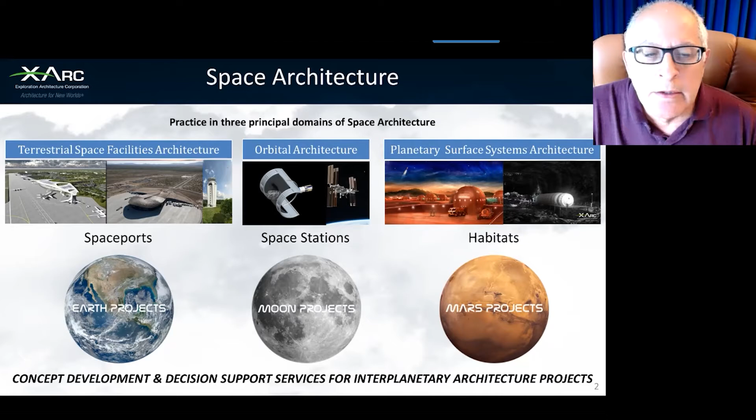This is the stuff that supports spacefaring activities here on Earth, such as spaceports. So we like to consider ourselves, XArc here, as interplanetary architects. We have projects on all 3 planets, or we're endeavoring to have technology development for all 3 planets.

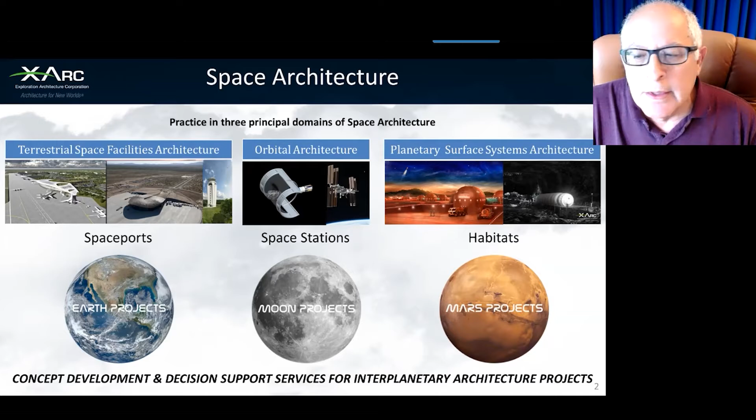A little background on XArc: it's been around since 2007, mostly working in the spaceport environment. We were part of the team that did the first commercial spaceport in Mojave with Virgin Galactic and Spaceport America. We also were pretty instrumental in leading the concept design for the Houston spaceport, and those 2 spaceports have been pretty successful. They're ongoing.

So these are realized projects that are happening from what we do. Our latest customer is the U.S. Transportation Command. These are the guys that transport military personnel and material all around the globe and get forward bases set up. They want us to look at the idea of spaceports globally for point-to-point rocket cargo in under an hour of time. Our role there is to understand the logistical constraints and the infrastructure requirements for supporting that type of activity. So it's not just the rockets, it's the ground support systems that have to be put in place and understood.

So after 2007, through some time trying to understand our niche in the marketplace and the recent development of commercial space activities going on right now, we spun off from XArc a company called Astroport, started last year in 2020, to do the civil engineering part of it. You can think of XArc as the architects and Astroport as the civil engineers for the construction of lunar surface and eventually Mars applications, understanding the materials needed for construction and the processes and methodology for how you do these civil engineering projects.

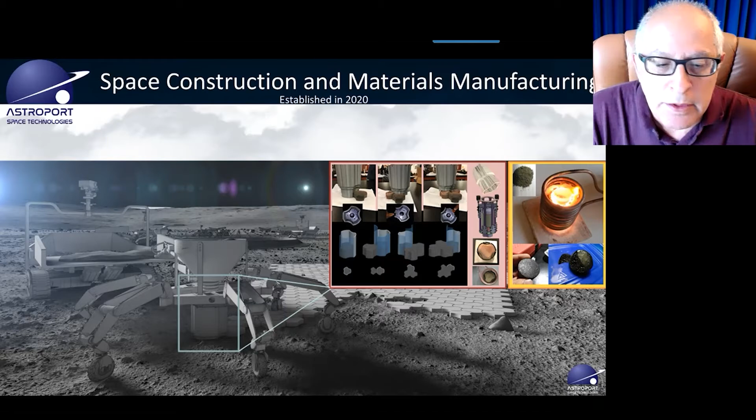The other organization is Wex Foundation. This is our NASA Space STEM education group. We believe it's important to grow this next generation of engineers and aerospace enthusiasts, and that anybody can be involved in space. With some substantial funding from NASA, we've been able to set up 2 programs.

One is called LCATS, the Lunar Caves Analog Test Site Program. That curriculum was pretty successful, so we received another grant from NASA to establish the program in schools around the nation. We have about 28 schools already established for the curriculum. We target middle school through high school students. Our idea here is to take the framework of the technology we're developing and turn it over to the students to help us with solutions in that regard.

So the whole aspect of what we look at is we have planetary features of pits and lava tubes that serve as the basis of our technology development.

So this again is the framework that we circle our technology when we start or choose a technology to develop. How do you access these pits? How do you deal with them in terms of exploration and reconnaissance? How do you actually live in them? How do you use them for habitability?

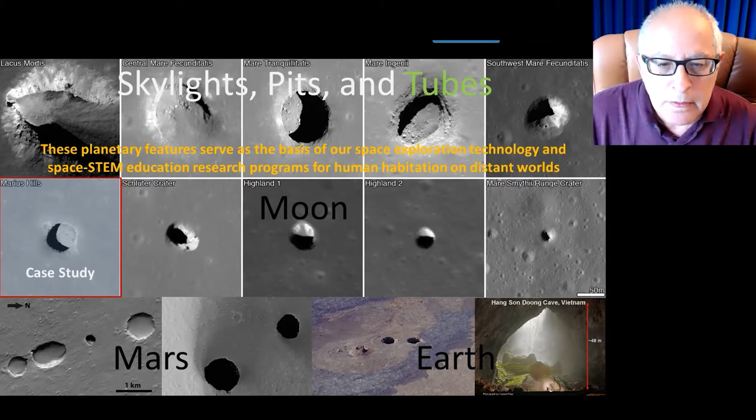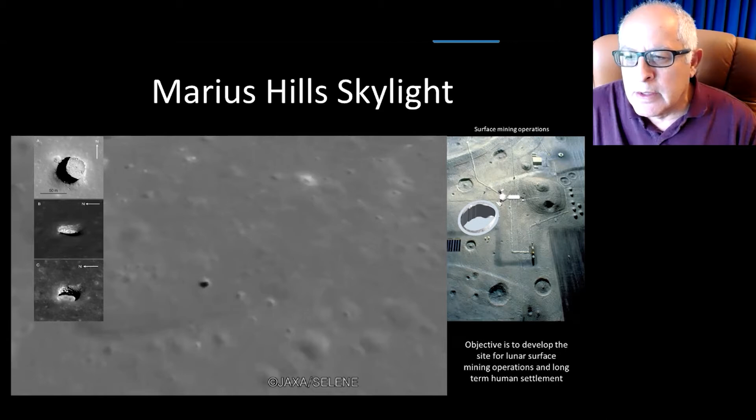So with that, we focus on one particular one called the Marius Hills Skylight. We think that this serves as a framework and a basis for technologies that not only apply to this particular site, but to any lunar pit or lava tube. And the idea here is to understand the site for surface mining operations and eventually development of the site and what you need to do to put it in place.

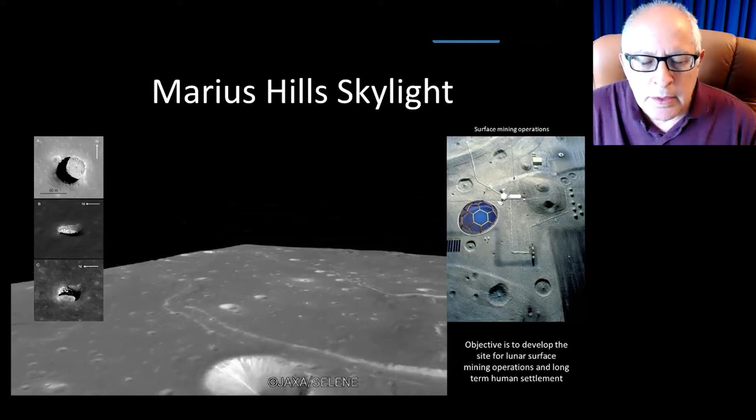So eventually get to a point where you have it covered. The dome is just notional. We don't probably see that happening, as Grant mentioned - probably wouldn't be a clear dome and not as high. But the idea here is to take that site and understand the surface infrastructure requirements for it.

I don't know if you see the cursor here, but the spaceport itself, the landing port, part of it, is located behind some geographic feature to help with the plume blast and mitigation of sandblast on your assets that have already been put in place. There's probably a more developed site later on.

And then we have over here the surface mining activity where we're harvesting the regolith and producing with the processing plant fuels and oxygens, and then burying for storage. Nuclear option over here for the power system, again behind some sort of rim for protection. You have to have it some distance away, and then augmented also with solar arrays and communication towers.

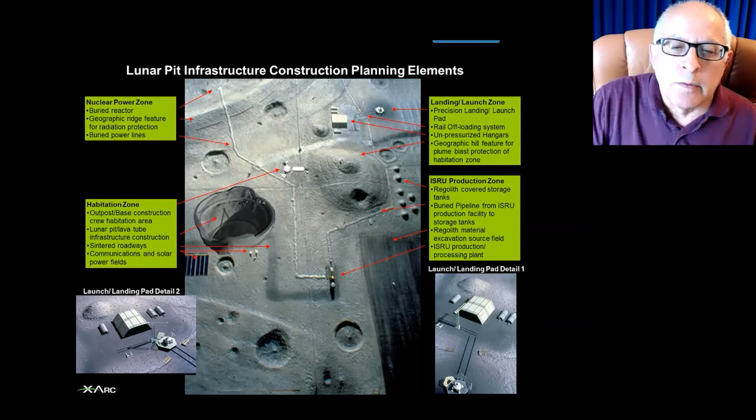And then there's the construction activity going on around the pit as we get to a point where we can do that kind of thing for making it habitable and useful as a place for settlement. Initially, I think that you're going to have just as much surface infrastructure and surface habitats as you will underneath the surface as well. Certainly in the first days of the construction, you need to have the construction crews and the way to do the operations of all the machinery that's going to be happening over there.

So we have a notional framework for what's the phases of the development of a site like this. We call it Lunar Ecosystem Architectural Prototype, or LEAP-2. It's a consortium of companies that have come together with us to develop these different technologies. Each one sometimes works collaboratively, or sometimes they work on their own R&D. But the idea is to focus the technology development on the lunar pits or the lava tubes.

And we use this timeline, and timelines are kind of tricky. We never know how the programs are going to go and what's going to happen in terms of the policies. But we use this timeline in that any phase of it, there's a technology that can be used and developed that's going to be useful. You don't have to start from the beginning to the end - you can insert your technology development at any point in there.

So beginning with reconnaissance missions for remote sensing - we're doing that right now. I think we have orbiting satellites around the moon, and they're doing all the mapping that we see almost every day now. Then the next phase is going to be the scientific robotic reconnaissance missions - these are the autonomous missions that will go there to explore the pits, explore the site. This timeline, 2025, we probably won't make that. I think the first CLPS lander is trying to get to one of these lunar pits.

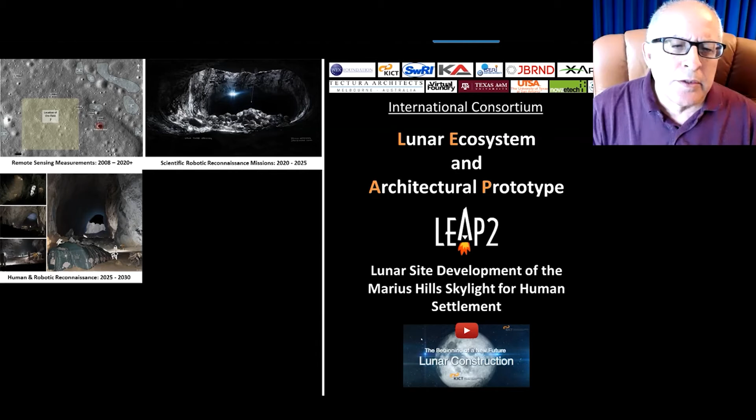I don't know if they'll ever be able to get into it in that time frame, but eventually we'll be there. And then we get to the next phase, which is the human reconnaissance part of it. This is the human robotics, where the humans come to ground truth what the robots found, to make sure that the pit is even a viable location, that it's structurally sound for long-term habitation, and it's basically human exploration of the pit itself and the caves.

And from there, you go into the next phase, which would be more of a long duration stay. The prior phase is probably 3-day missions, short duration missions. When we get to the long duration stay, now we're talking maybe months at a time. We probably have the ability at this point for a more permanent infrastructure or habitation module that we put in there.

This is kind of a notional idea of an inflatable that could be installed for a longer stay.

From there, by the mid-century we get into the construction part of it, the real civil engineering and development, clearing out the site and debris, and access to the tunnels. You have to remember that the pit floor at the pit location is the collapsed part of it. So the roof is on top that you're walking on, and you're probably going to be walking down to a bunch of rubble debris to get down into the cave, and maybe it's even going to be blocked before that point. So you want to clear it out and start putting in your infrastructure for the long term. Then by the end of the century is when we start talking about real long term.

Sophisticated, mobile, hundreds of people living in a base.

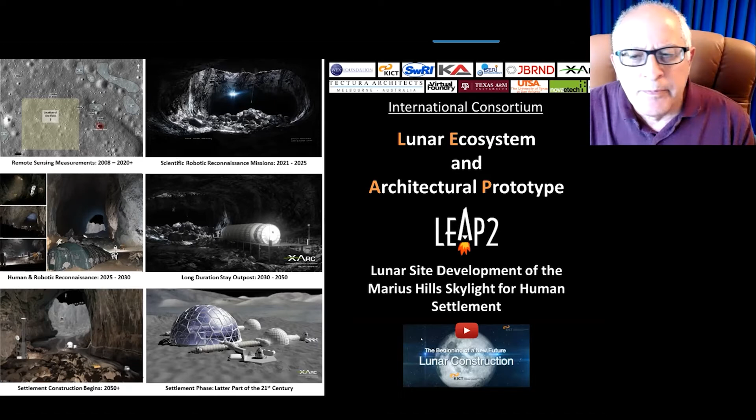Let me go to the technology we're working on right now. This is one of our first technology developments. We want to learn how to design our equipment and hardware so that we understand the environment in terms of the dust.

This little measurement instrument is measuring dust accumulation rates. It's a small instrument that fits in the palm of your hand. We want to get it on the CLPS mission. It uses a pretty mature technology called QCM, quartz crystal microbalance, and what it does is measure on the crystal itself. You can see there's a small crystal, and as grains or microparticles land on it, it measures the frequency change, which over time gives you an accumulation rate of grains continuing to fall on it.

For example, man-made disturbances of the surface, such as a robot moving by—or in the case of the CLPS mission, it wouldn't be a human at that point—robots moving by, or even micrometeorite disturbances, and natural phenomena such as what you see at the terminators at sunset and sunrise, where there's an observed phenomenon of dust grains arising at that time period.

So first, it's a science mission to understand that phenomena, and secondly, it's an engineering mission, because if we can understand the dust accumulation rates, you can extrapolate that to understand how much dust you're going to have over a period of time landing on your solar panels or in your gears and whatnot.

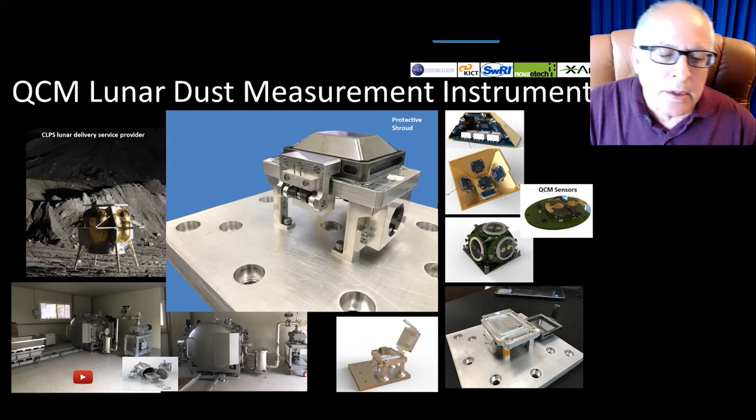We've done vacuum chamber tests on it. Maybe I can show you this test here—this is kind of interesting. Let's see if this will come up or not.

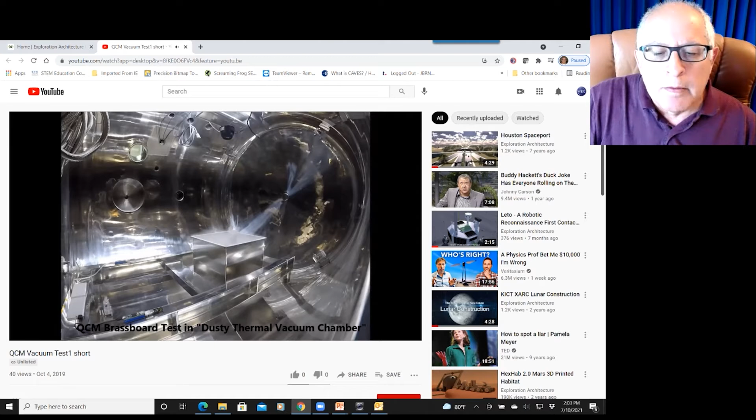So this shows we put it in a vacuum, and we learned right away that we're going to have to cover it. This is a thermal vacuum chamber, evacuating the air with the simulant in there. You can see right away it starts boiling up and saturates the crystal immediately. That's when we went to the dust cover. After a while, you'll see it get to an eruption boiling point.

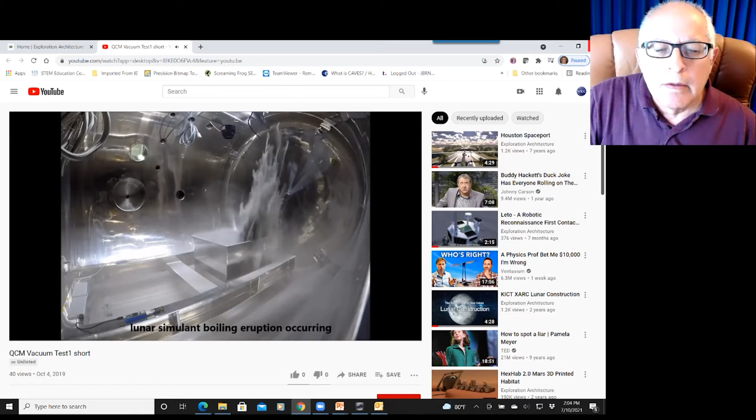So from that, then we go into what we're doing with the ISRU technology. We're trying to take the dust, the simulants. We have a quarry here in Texas. We're located in San Antonio, and we have a quarry called the Knippa Quarry, and that's where we get our basalt simulant.

It's not an exact match, but it's got the mechanical properties. It doesn't have the chemical properties, but it's very good for at least getting the first order of magnitude indication of what we can do with it in terms of melting it and turning it into stabilized or solid material.

We're also looking at how we can turn it into an extrusion material. So we've been doing tests with some of these bricks we've been making, also laser seaming it down here at the bottom. You see some laser seams—we've taken a laser and tried to seam the bricks together. So when we started doing that, we started thinking about how we actually apply this.

We have two ways of doing this. We're doing brick forming, where we're actually melting it through an induction heater, and then printing out the tiles for landing pad applications. You can see here one application: we would print these tiles, and they'd be melded together on the sides, but on the top they'd be seamed together with the laser seam as well.

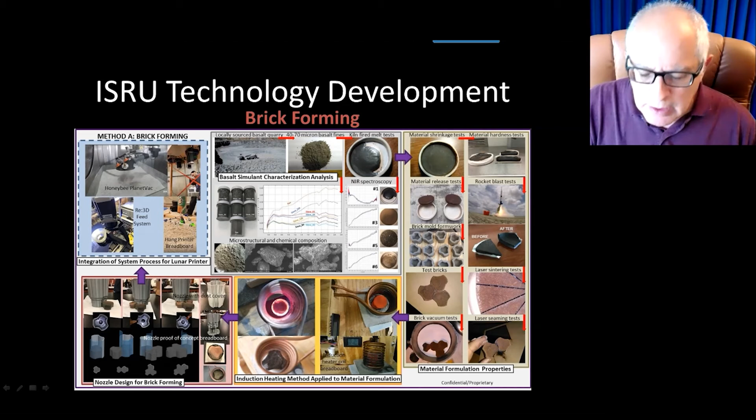One of the things we're working on is a collaboration with Honeybee, where we're taking their PlanetVac, and that's one way we acquire the fine grains out of the excavation material. Then we're doing extrusion layering. We've been able to take the basalt material and actually bind it with a PLA binder to produce a filament, and we've actually 3D printed with it.

These blocks over here have been 3D printed with this basalt material. The ratio is 80% basalt to 20% PLA, so it's not a true ISRU yet. We want to start doing the binding and the 3D printing with filament, not only filament but also pellets that we create.

Over here, we've been able to do the pellets in filament. Pellets will give you a bigger bead, a bigger nozzle that you could extrude out. We want to get to about 50 millimeters in size, but in time, by the time we get to printing out habitats.

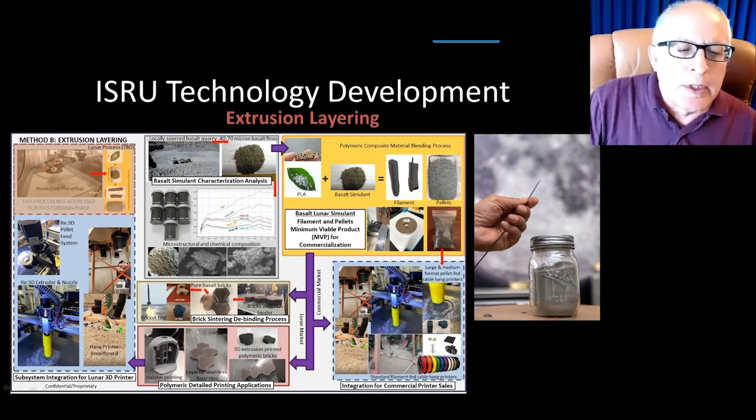So with that, we have a 3D printer we're working on too, called a hang printer. I'll show you an image of that in a little while.

One of the things we're also doing is we need to figure out the platform. So we're working on robotic platforms for hanging the induction heater itself, and also for the hang printer. Here's an example of what this hang printer technology is looking like. Let's see this image—this video comes up.

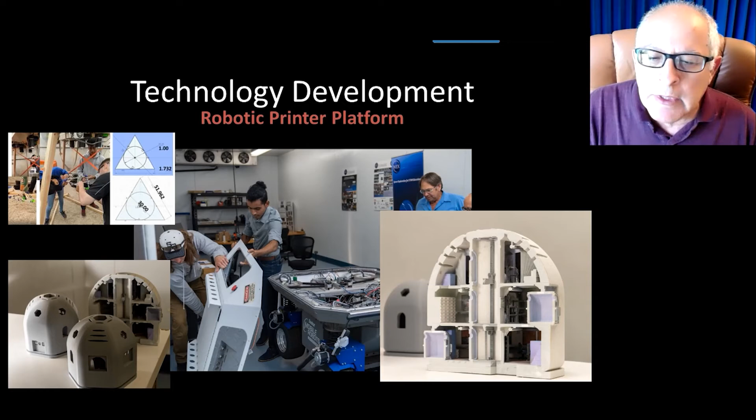The idea for the hang printer is that we want to get away from a large, heavy gantry, having to bring up a big bulky thing. This hang printer can print from a meter to meters in size. We could hang it around a pit's edge and print from the bottom up if needed, putting a structure that way, or even hang it from the walls of lava tube caves for printing inside the tubes.

We have a test bed where we've taken our LCATS simulant, and we're doing this mostly with our students, where we teach them how to make robots, and their task is to figure out how to get into the pit, how to traverse the terrain, and learn how to get down in there with whatever concept they have. There's all kinds of concepts they've come up with for getting down into the lunar pit.

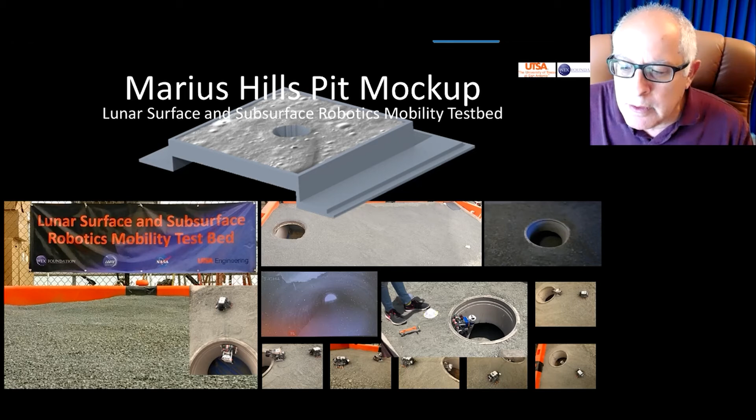But at the same time, I think it's important to understand that civil engineering aspect that goes into, for example, the underlayment that has to go in before you start printing onto the lunar surface. How do you pack it down and do compactions?

We've been doing compaction studies with a regular compressor, a sub-vibrating compressor. We've taken our commercial LCATS soil and done some compaction testing, where on our test bed we put a layer of, I think it was a 2-inch depth, of the loose fine soils, loose fine regolith or the simulant.

Did some density testing and then the vibration test of the compactor. What we found was that the wheels were not the right traction to be using here - that was a bad design. The first run of the compactor really did do a pretty good job of compacting it, but it didn't get very far because the wheels got caught up in the dust accumulation. You can see in one of these images all the dust started flying everywhere when it started moving. So those are more lessons learned.

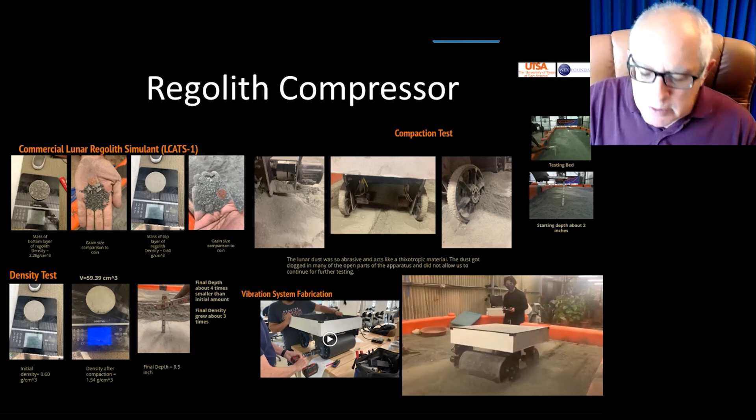Back to the melting technology. We just received an STTR phase 1 award from NASA where they want us to take our melting technology and our nozzle. We have a proprietary nozzle that actually allows us to form the bricks in one step, and also place the bricks. So we need to combine the heater with the nozzle to produce this induction furnace nozzle in a one-step process, acquiring the powdered fines, forming the brick, and placing the brick at the same time. You can see here, this is one of the first solidified materials that came out of this furnace.

In terms of the pavers that would come out, this is our interlocking paver system. The idea is that as this nozzle places the brick, the heat of the first brick and the heat of the second brick meld together, and then it moves to the third place, and the sides of these bricks are melded. Then, if you recall, I showed you that laser seaming - they would come back around the top and laser seam the top edges to get a cohesive surface.

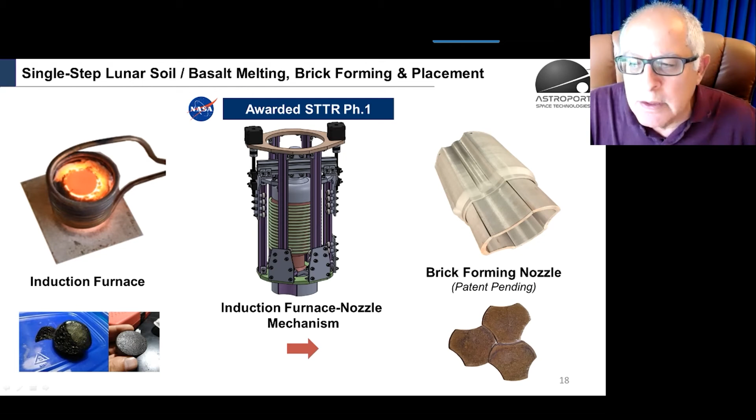At Astroport, we're developing a portfolio of technologies. There's a third process we have where we sinter the brick with a binder, but then we go back and reheat it, and we pull out the binder, leaving us with a pure basalt brick. That way we can 3D print it with some fine honeycomb shapes. There's the printer, there's the other printer, and there's the laser seamer as part of those technologies.

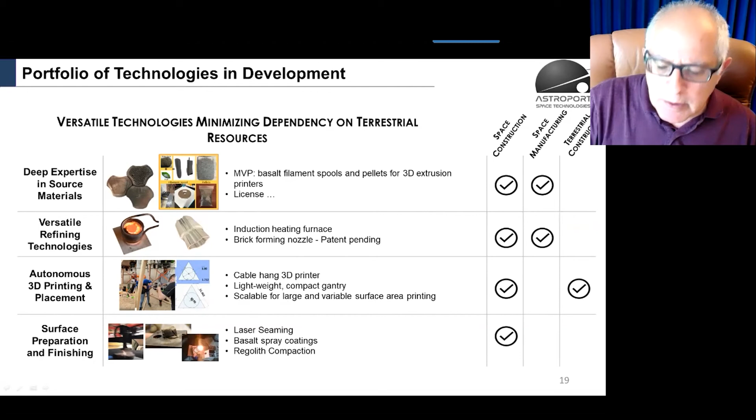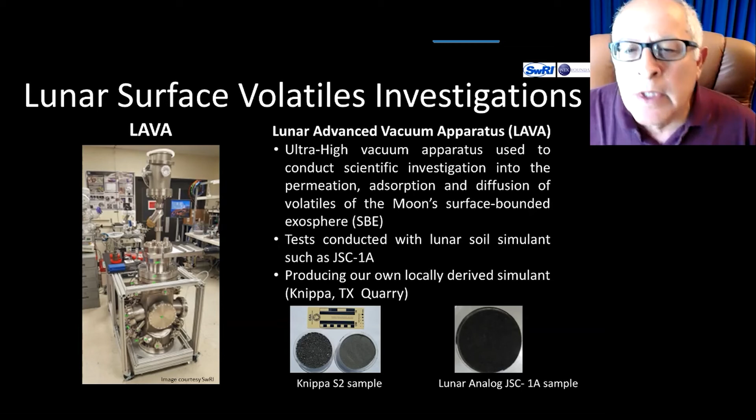We also think that our heater is going to be useful for volatile extraction. So we don't only want to use it for printing bricks, but also for extracting the volatiles and minerals out of the regolith. We're doing tests in volatile extraction with the Southwest Research Institute down here in San Antonio - we're partners with them in a lot of these projects.

We're also looking at lunar pit access. Here's one concept we have for how to get down to the pit using a zipline concept. These pits are pretty deep - you saw some images earlier about the Tranquilitatis pit, which is about 100 meters in depth. This pit at the Marius Hills is about 60 meters in depth, or maybe even 45 - I think we recalculated that, it's 45 meters deep. So it's a little bit easier to get down into, but still hard. You can see here the scale - this is a scale model showing how the tubes would go from one side to the other side with the pit floor down here.

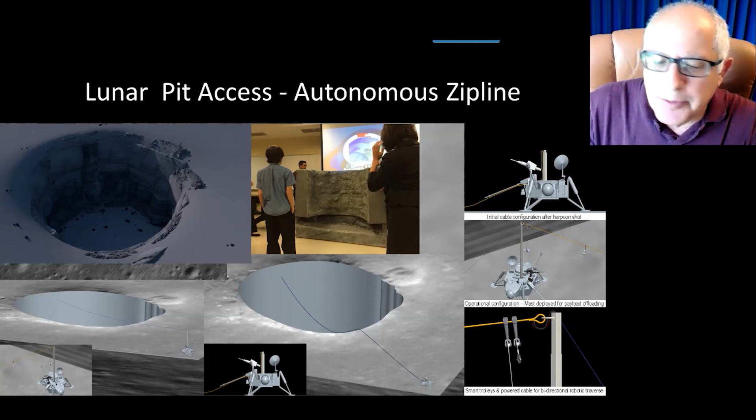I think I have a movie to show you if we have enough time. This is our LIDO mission that we're developing, the mission concept for how to get down to the Marius Hills and how to approach it. We have a concept called green reconnaissance - the idea is that we don't want to land right next to the pit with all the hydrazine or rocket blast and plume contaminating the pit before the scientists get in there with their instruments. So with green reconnaissance we'd land at some distance away from the pit, using protective but natural features, and then traverse to the pit - probably a kilometer of distance, maybe a couple of kilometers. That's going to be a challenge in itself, to get to that pit with the ability to get down in there with the zipline concept.

If I have some time, I'll show the video of the mission concept - it's about 5 minutes. Is there enough time there?

No, Sam, I'm sorry. To stay on track, you can go to the website - there'll be a picture of it there, and you can find it there.

xarc.com. It's pretty easy to get to.

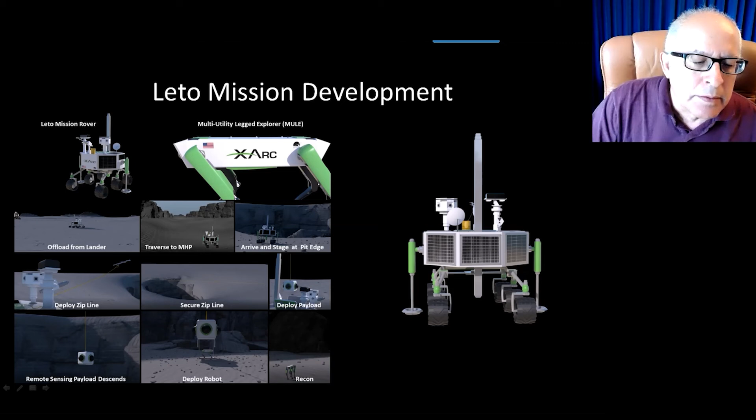The idea here is to use the zip line to lower down the science instrument, and it carries with it a robot dog, which we call a mule, multi-utility legged explorer. It goes into the cave and does its reconnaissance mapping with 3D LiDAR measurements, then comes back and relays that back to the rover, which relays it back to Earth.

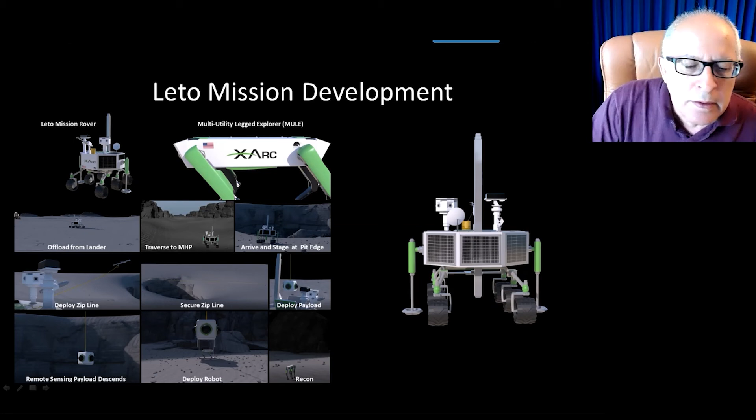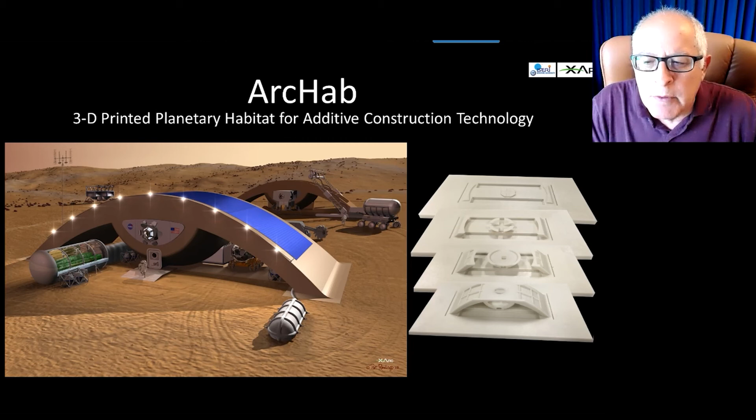With that, I think there's some time left. So quickly, here's some habitat stuff we've been working on. This is more Mars-type things, but we've been looking at habitat development with 3D printing, and looking at the interiors of how you live with a crew of 4 in a really confined area. This is a 2-story situation here.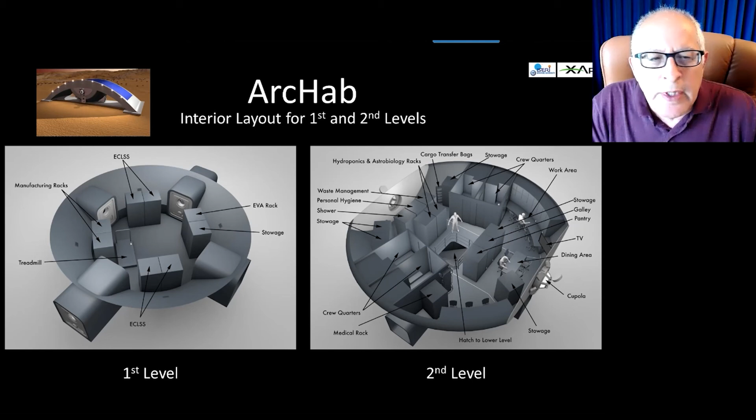We advanced from that to our Hexhab concept, which is a bit more of a 3-story structure. This is part of the 3D challenge that NASA had, the 3D printed habitat challenge. This idea came in 4th. It didn't get to where the prize money was, but we did reach 4th place.

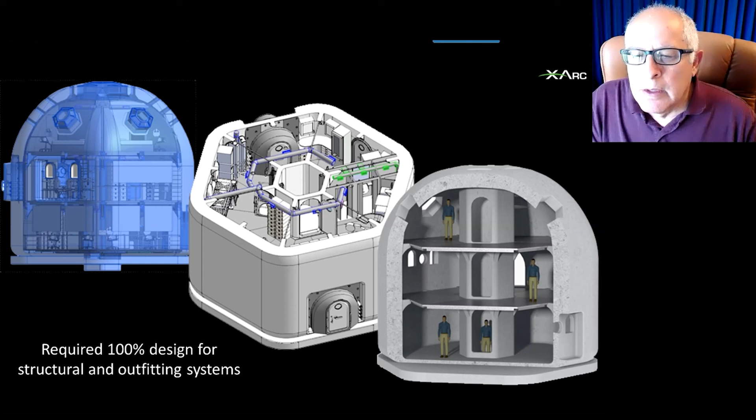The idea was to really outfit the whole habitat with all the environmental controls and mechanical aspects. You have to understand how you build it out, and also the construction process had to be understood as well. If you go to the website, you'll see a movie of it and how that whole construction scenario works out, and there's interior pictures of the habitat.

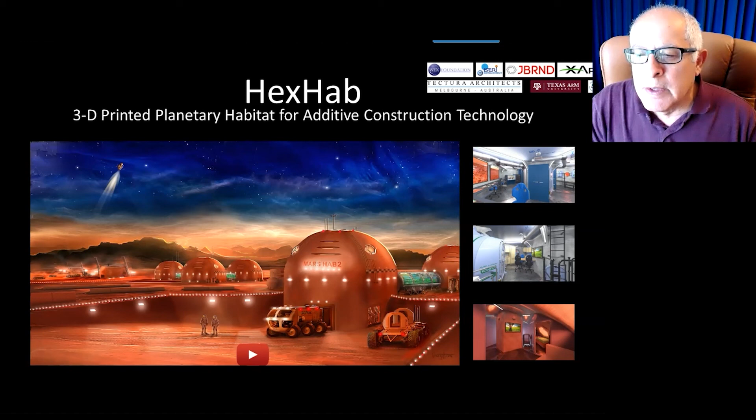The idea of the habitat's 3 floors was that each floor had to be self-contained in case of a breach in the hull, or some sort of catastrophe where one floor had to be evacuated. Each floor was self-contained and didn't have to rely on systems from another floor, and it was designed that way purposely. That's why when you see a ladder or an elevator in the habitat, that's the reason for it—it was to be able to seal off each floor.

Here's the concept of the inflatable. We're looking at these foam inflatable tubes as a way to do the expansion, where it's packaged up in the rocket fairing, along with the floor panels. Eventually these inflatable tubes expand out both sides, and the floor panels themselves are automatically dispersed or laid out as well.

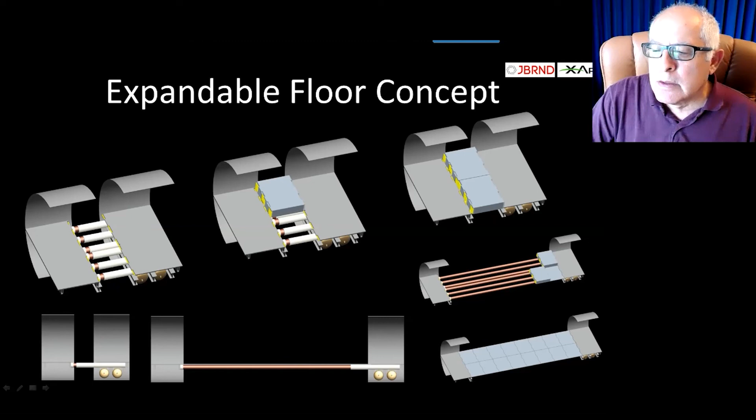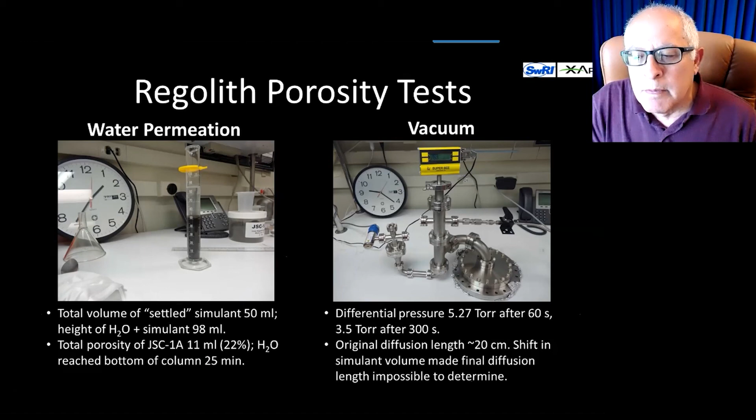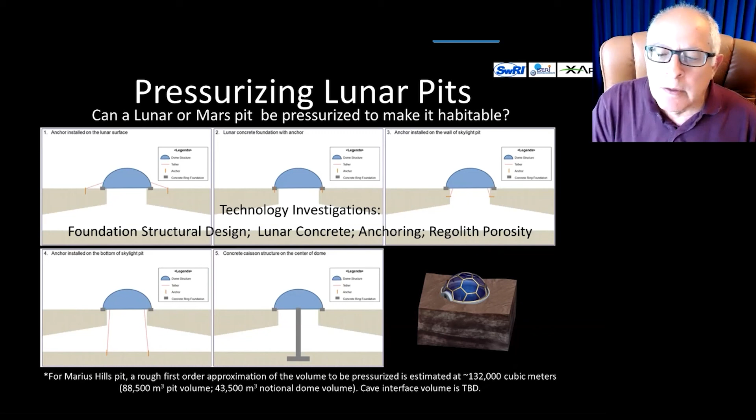The regolith porosity test is the gas part. We have to understand the gas porosity of the regolith if we want to start filling up the pit with the dome, so we understand the leak rate of the gas. When we talk about putting domes on these pits, we're talking about 132,000 cubic meters of pit volume, so that's a lot of gas. How are you going to create that gas? What's the process for doing all that? It's a lot—that's why it's a long way down the road before we get to carving these domes.

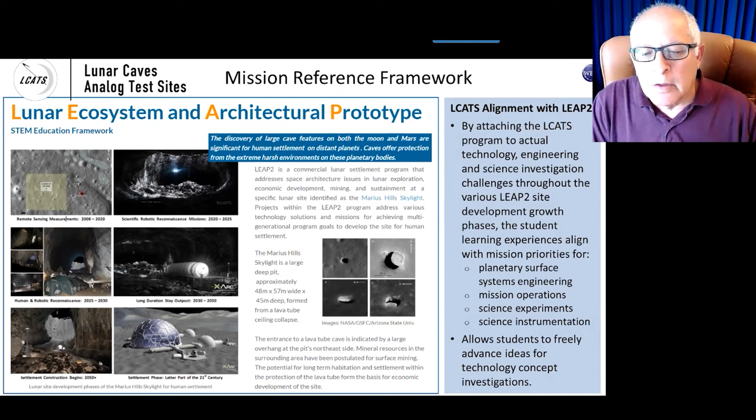Just real quick here, I'll end with this—this is LCATS, part of what we do. All those technologies we showed, we give those same challenges to our students, and they go out and use the LEAP2 program as the framework for what they're charged to solve for us. They go into caves here in the area, taking science measurements and instruments into the caves so they can do field tests and learn about exploring these environments.

It's a really good, successful program. We've been at it for the last 5 years, and we've seen students go from not knowing what they wanted to be to now being in college in aerospace careers and aerospace majors. The idea was to give them the remote sensing project first.

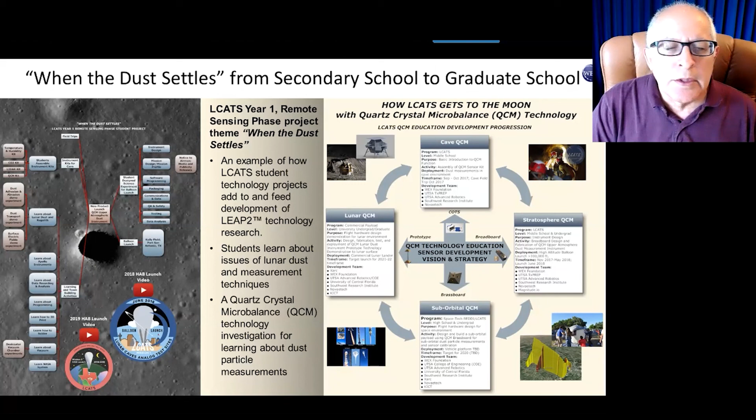That's the first year of the project. They commit to the program for 3 years. The first year they do remote sensing, the second year reconnaissance robotics, and the third year space architecture applications. In the fourth year they actually make a comic book—the first one's being printed this summer, showing their experience. They also do balloon launches, and that's just a kind of curriculum, a little busy chart.

It's a little busy chart. And with that, I'm done. I think that's it—thank you very much, Sam.

There's so much in there. If I were to redo my career and go back in time, I think space architect might have been the path I took—I'm fascinated by that. I want to talk to you offline about a couple of these things. This is terrific, yeah, it's been fun. We do need to move on to get back on track. So thanks a lot, Sam, really appreciate it.